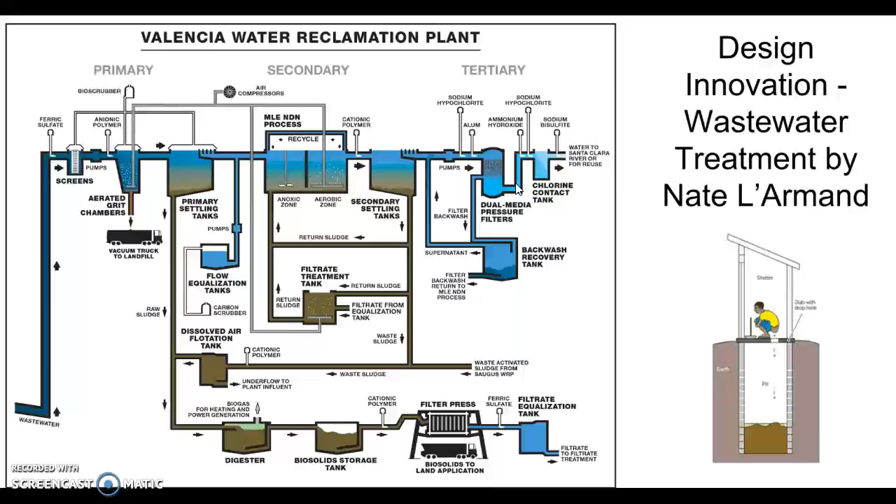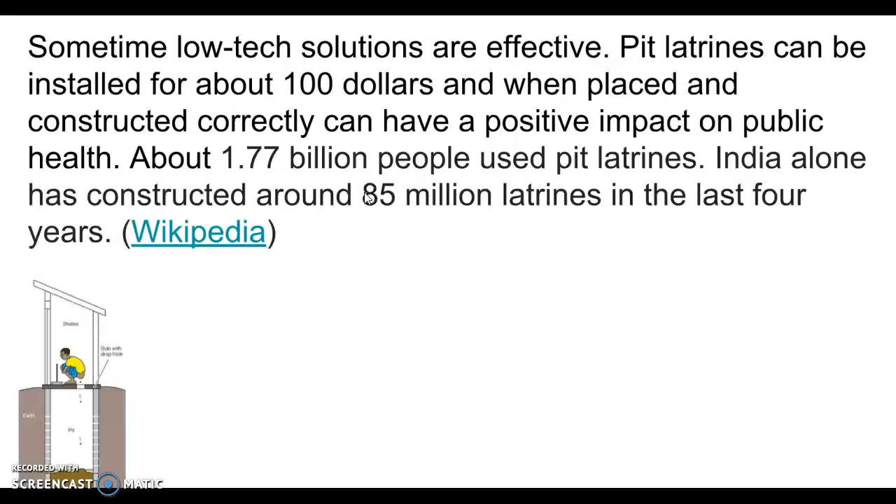Like I said, a lot of people still use pit latrines. According to Wikipedia, 1.7 billion people still use pit latrines, and just in the last 4 years, 85 million latrines were constructed in India. This is fine for a rural population, except in Europe and America, the population moved towards the cities around 150 years ago, and latrines simply don't work for high-density human populations.

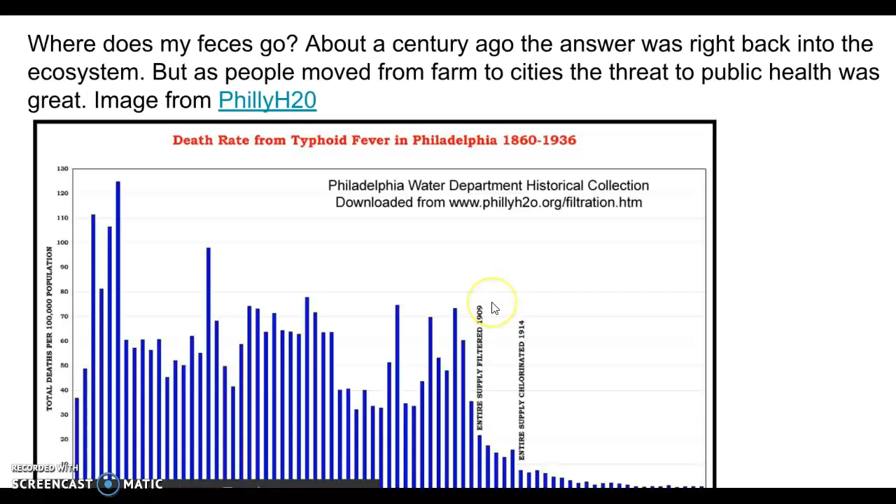Well, Louis Pasteur, yes, the Louis Pasteur, noticed that this compound, sodium hypochlorite, bleach, is an excellent disinfectant. It kills microorganisms. And this discovery is still present in modern wastewater treatment, as you see. Sodium hypochlorite is introduced twice, once before the filter and once after the filter, right before it's released back into the ecosystem.

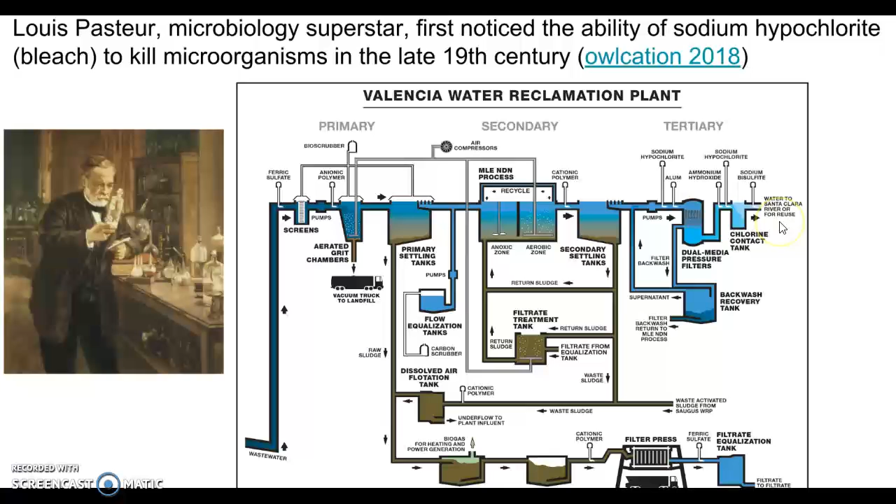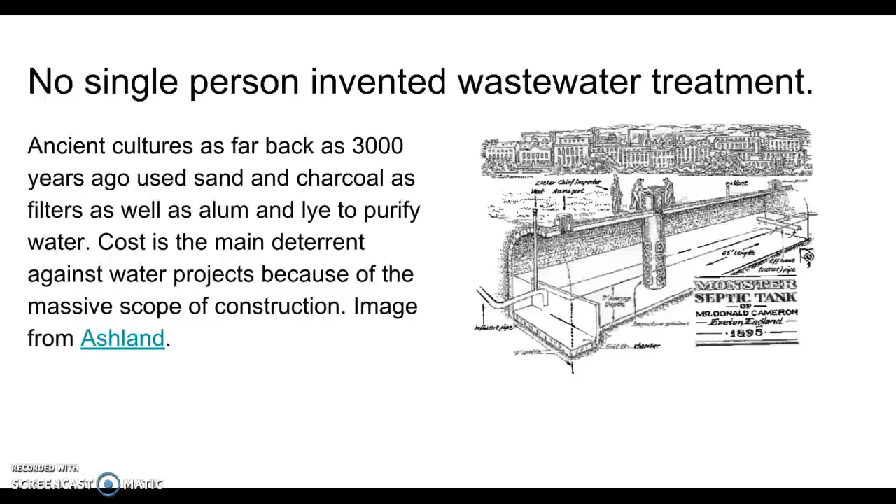It's hard to pin down who designed this system because thousands of people have chipped in. Using sand filters is an ancient technique, and using alum and lye to produce basic pH to pull out metal ions has also been used since ancient times. There are a few patents, such as the Arden-Lockett paper. That is a patent on the activated sludge idea, that is recycling the microorganisms for the aeration stage.

There's also a patent for this machine right here. It's called a step screen. And that's what I'd like to focus on. Obviously, there's a lot of chemistry going on here. There's a lot of control systems. The electrical engineering is obvious. A lot of biological engineering going on right here, but I'd like to focus on just this mechanical system. It's basically at the head of the wastewater treatment facility, and it's called a step screen. So let's check it out.

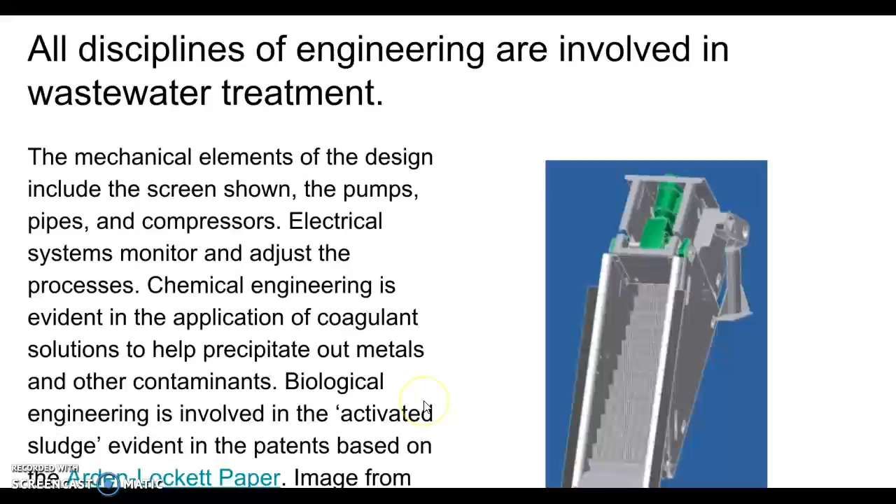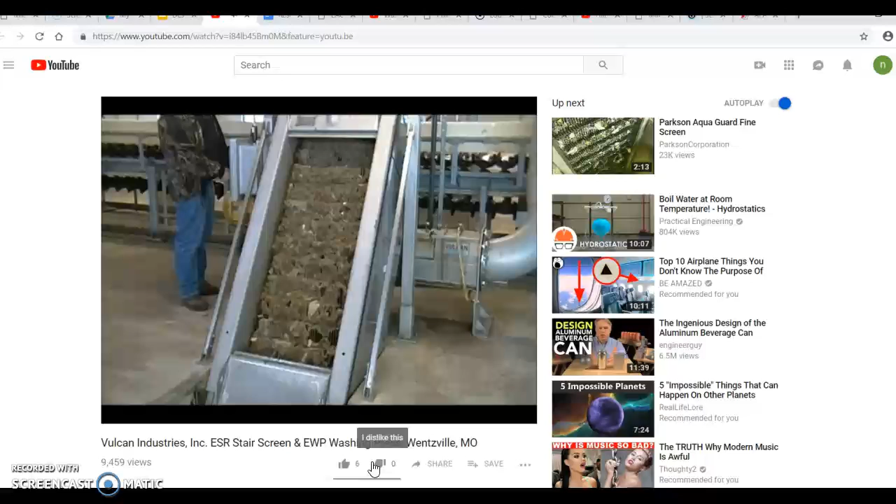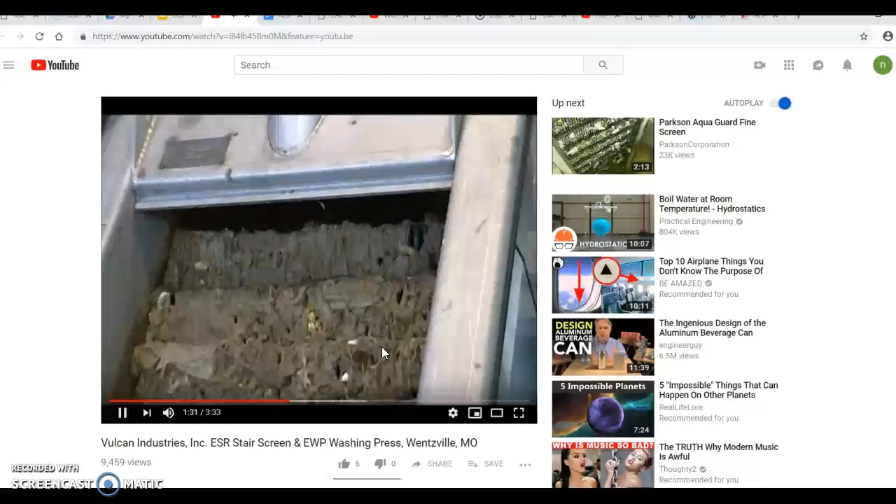Let's actually check out this thing in action. Like I said, it's at the very beginning of the process. And there it goes. So pretty clever, I think. The moving step comes in through the slots and moves all the debris up one step, and then on the back side you can see it scrapes itself clean.

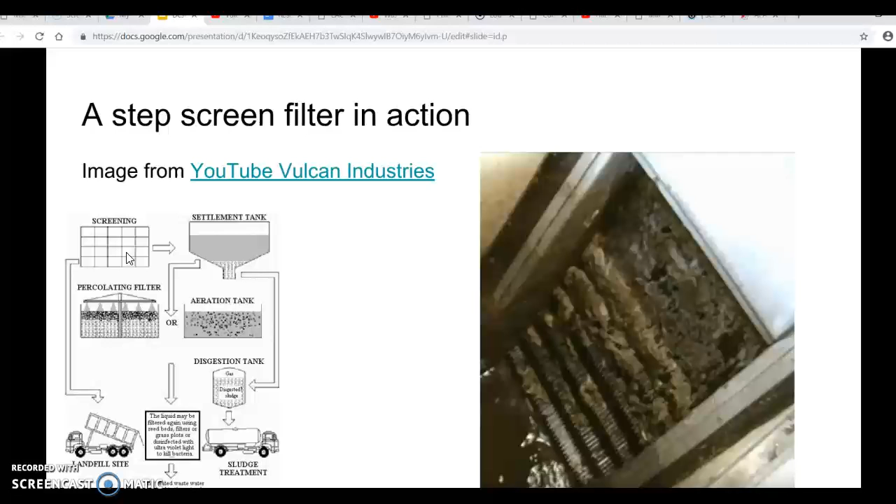So that's called a step screen filter, and like I said, it's right at the beginning of the process, before the settlement tanks. Here's another step screen processor, and I'll let you click on this video and watch the entire tour.